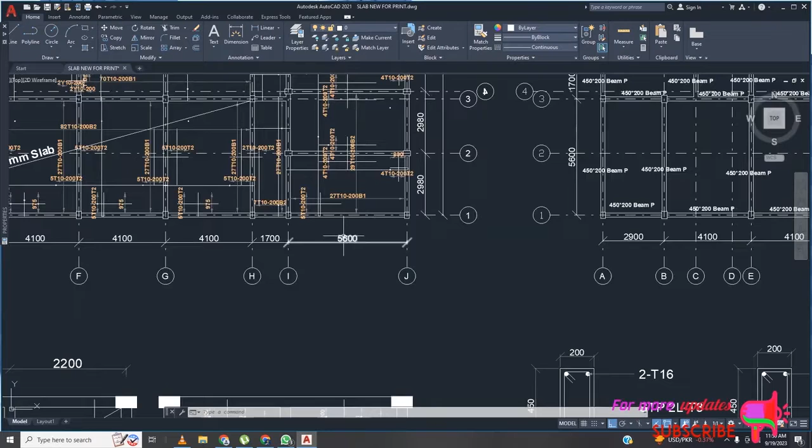Let's start. So you can see I have my AutoCAD file here. First of all, it is important to have a reference dimension so that you can use it to scale your drawing after you import it to Archicad. So this will be my reference, which is 5600 millimeters.

Then you need to close your file before importing it to Archicad. So I will close this file. My file is this one, Slab New For Print. Then I'll open my Archicad and create a new file.

So to import your file, you need to go to File on the top left of your screen, then Interoperability, then Merge, then Merge File. I will select the file that you want to import from AutoCAD to Archicad. So I'll go and open it, it's called Slab New For Print, and it is a DWG file.

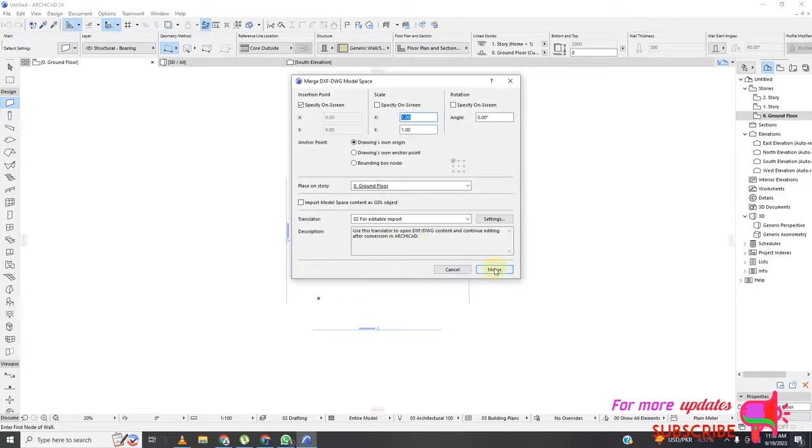Then skip all, then I'll merge. Then click just here, and then OK.

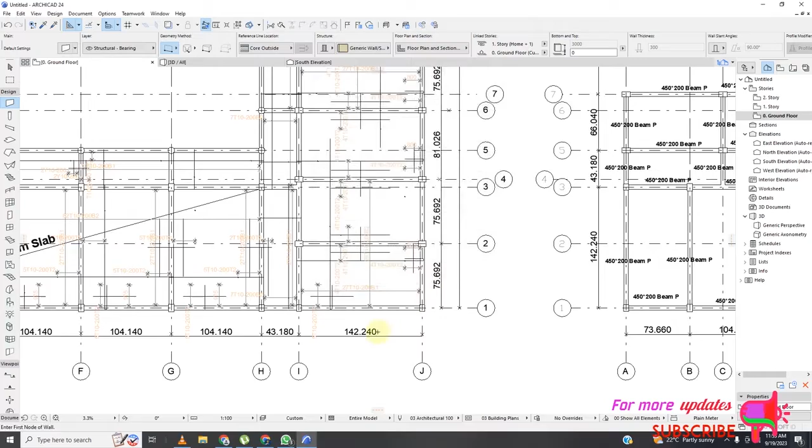So you can see my dimensions have been reduced into very small dimensions. My dimension in AutoCAD is in millimeters. To check your dimension in Archicad, you need to go to Options, then Project Preferences, then Working Units. You can see I'm working in millimeters. So this one is 142.24 millimeters, and now I need to scale this drawing.

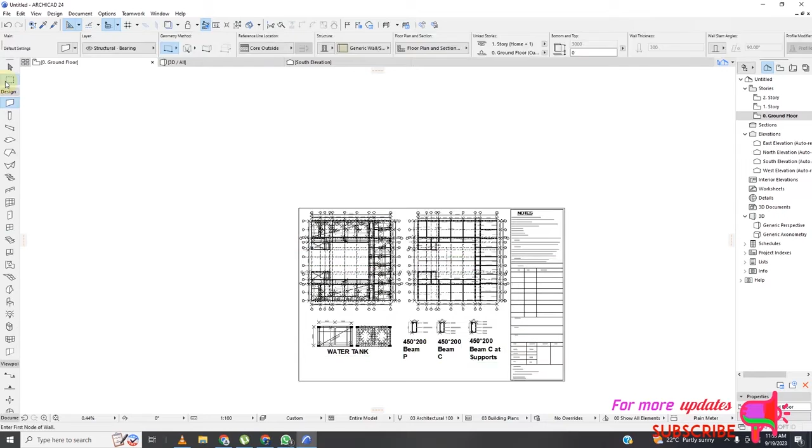So to scale this drawing, you need to select the drawing. To select, you can either hold Shift and then place your cursor and drag it - that is one way, and then click there. Or you can just select your marquee tool, then drag it, and then hold Control.

So to scale this drawing, you need to go to Edit, go to Reshape, then Resize, and then click OK, and then select your reference scale, so this one up to there. My dimension there was 5600 millimeters, so enter 5600 and then click Enter on your keyboard.

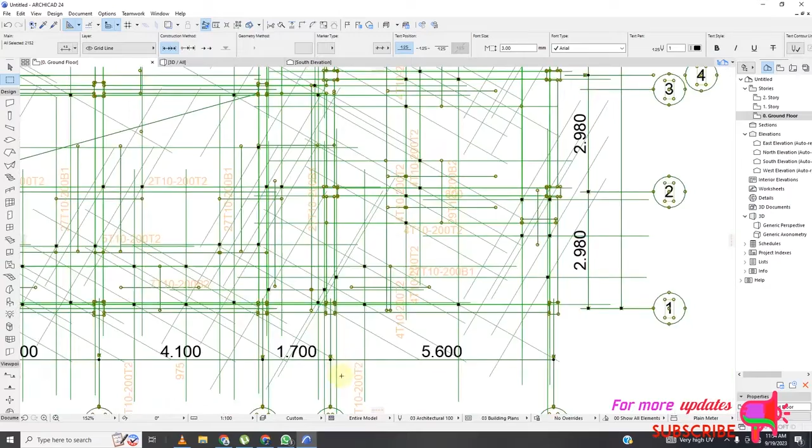Oops, there are two problems. Don't worry, I will show you how to solve this. First of all, you can see that my dimensions are in meters, but I want it to be in millimeters. I want this to be 5600.

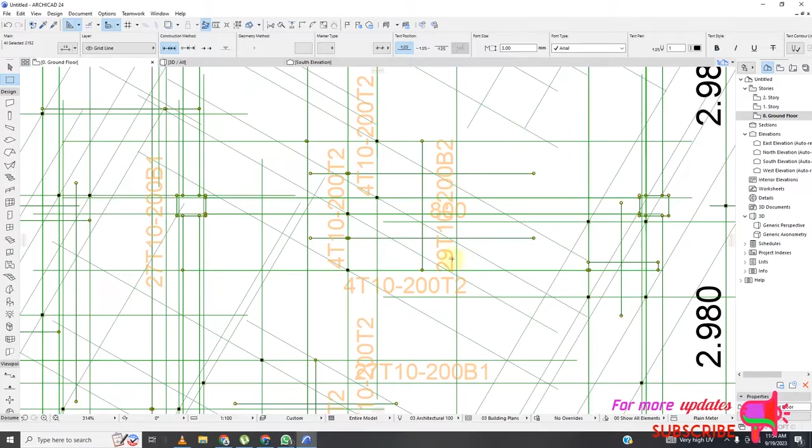Second, there are lines which do not appear properly. If you check this line carefully, these are the dimension lines for these bars. If you check very carefully, these ones are the ticks which are not appearing properly. You can see all where I've labeled my bars, they don't appear properly. So how do you solve that?

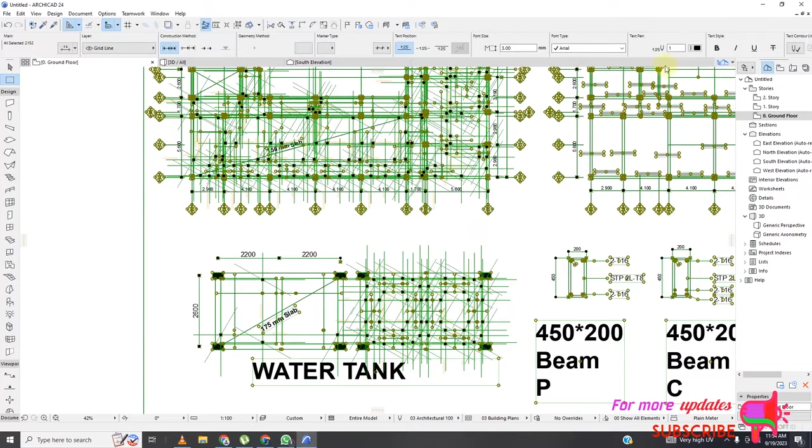First of all, I will close this. I've done that deliberately - don't worry, because I don't want you to face the same challenge and struggle to find a solution. I have it here all in one.

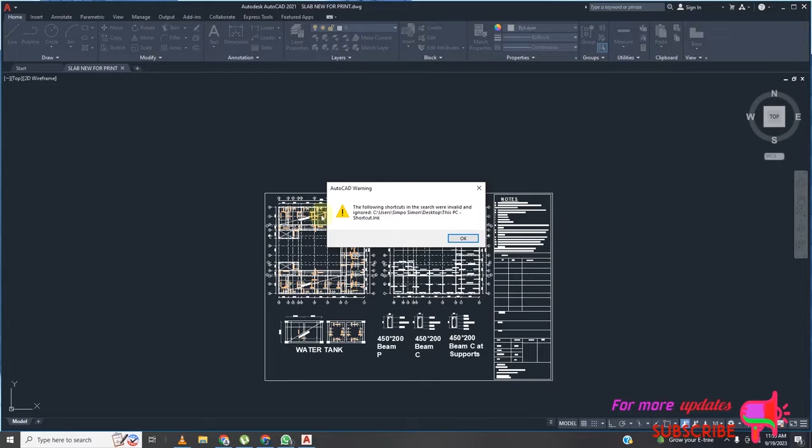So the problem was this: you can see when I import this to Archicad, it appears in a way which is not proper, because Archicad is changing it into Archicad ticks - architectural ticks.

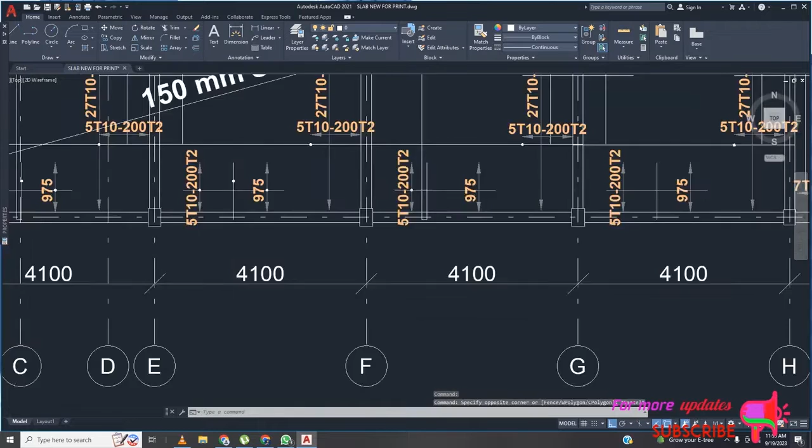So first of all, you should select all of these. Select similar, and then select similar again. Then you want to select all of them using Select Similar. I don't know if there's one which is not selected - let me just go through carefully.

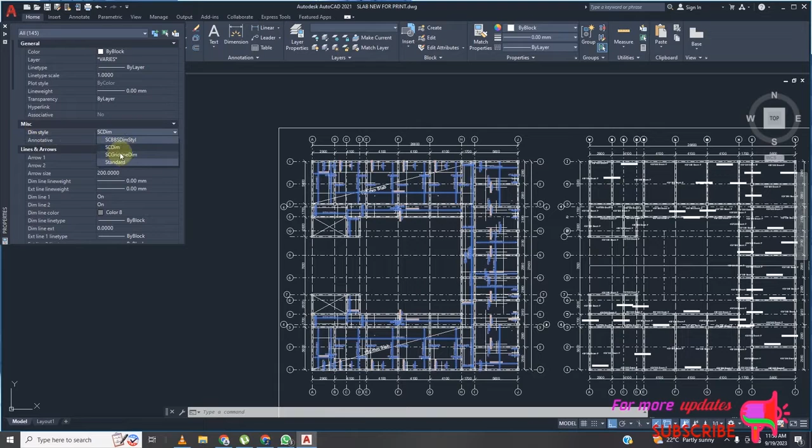Okay, so now that you have selected all, you right click on your mouse and then go to properties. What you need to change is the dimension style. When you change this, that problem will disappear. Now you can use either SC grid line. So change the dimension style - you can see MISC dimension style, change it to SC grid line. Now that problem will not happen again.

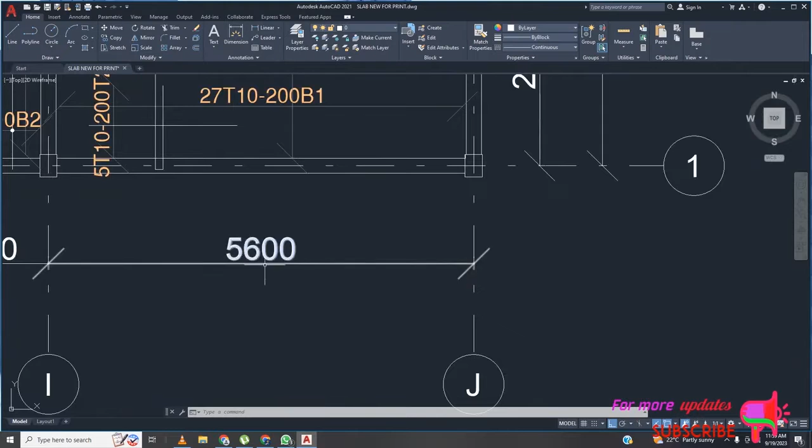So then you must close this file before you import it to ArchiCAD. You can see now this is still my reference scale, so I'll close this. Cancel first, then I need to save it, then I'll close it.

So let's open now ArchiCAD. Then open. View.

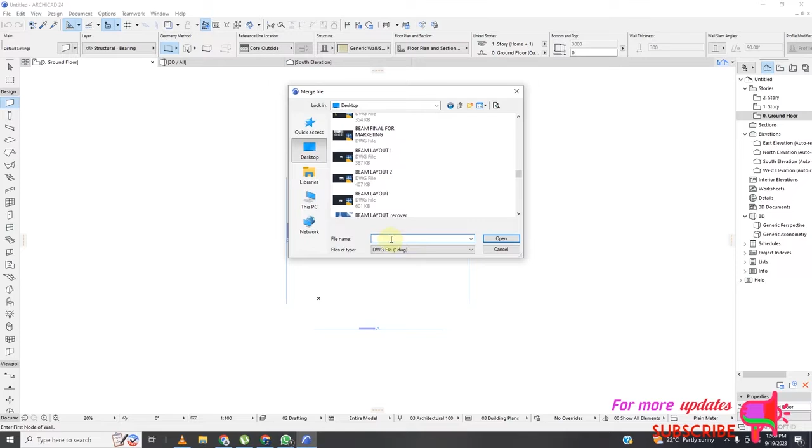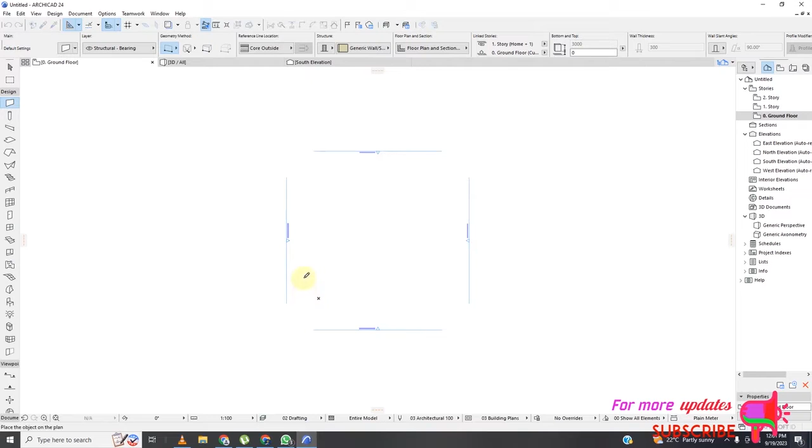To import, remember you go to File, you go to Interoperability, click Merge, then Merge File, then you select your file. My file was slab new for print DWG - this one is my file. So I hit open, then okay. And then you can just keep all. Then merge, and then click anywhere inside this, then okay.

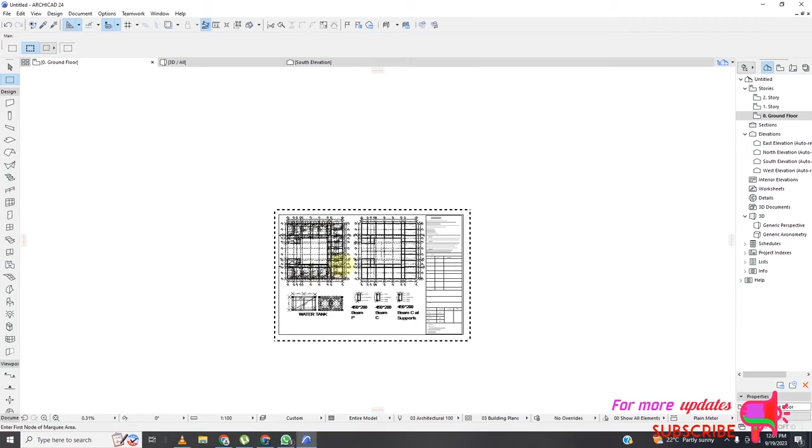And now select the marquee tool and drag it. That is the area I want to print. Then Shift Control, and then first of all, very important, you need to ungroup, suspend all groups, so that you can be able to resize.

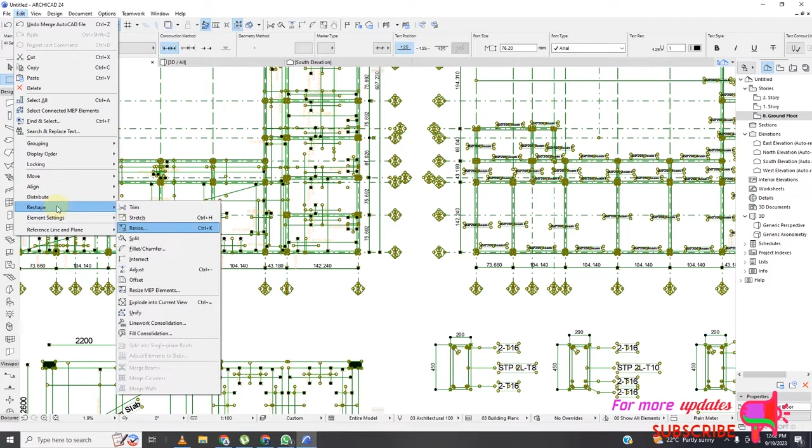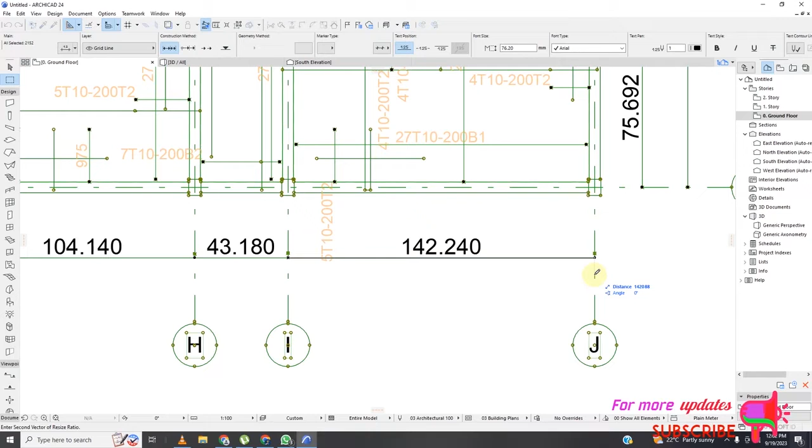So don't forget that - to suspend all groups, now go to Edit, go to Resize, go to Reshape, then click Resize, then okay, then click here, then click. If you don't select your ungroup, if you don't suspend, remember you will not be able to scale. So this one was 600. Enter.

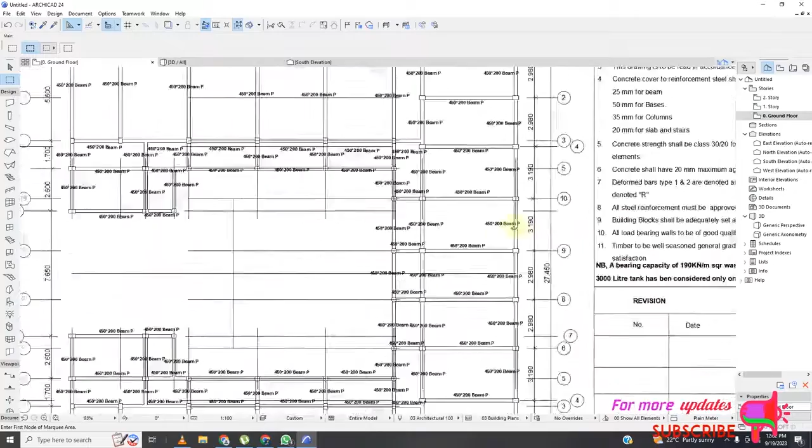Now you can see my lines appear properly. Okay, so the other problem, I can escape it - it's now my dimensions, which are in meters instead of millimeters, and I want these dimensions to be in millimeters. So what should I do?

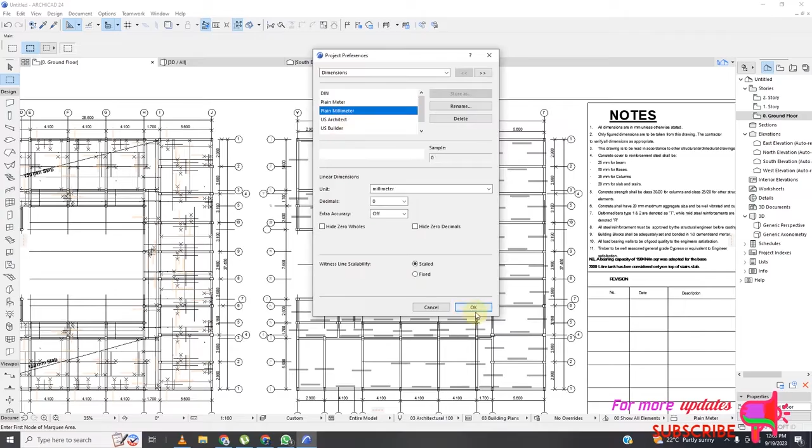Go to Options, go to Project Preferences, go to Dimensions. Now you can see I'm currently using plain meter. You should change it to plain millimeters. Then okay. After you do that, you can see now the dimensions have changed into millimeters - now you can see it is 5,610 instead of 5.6.

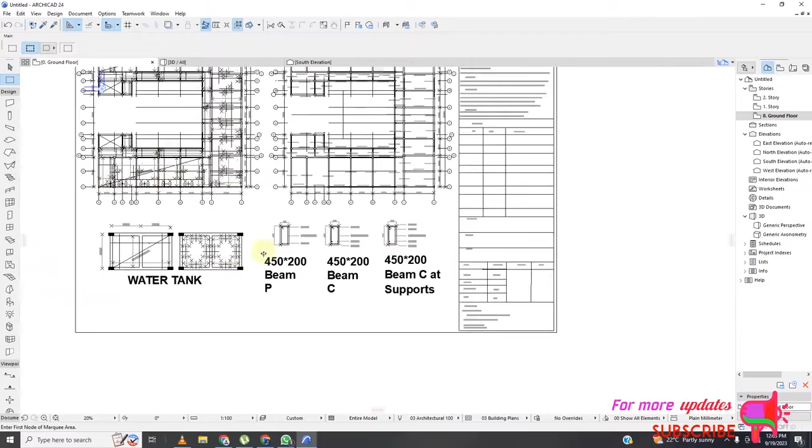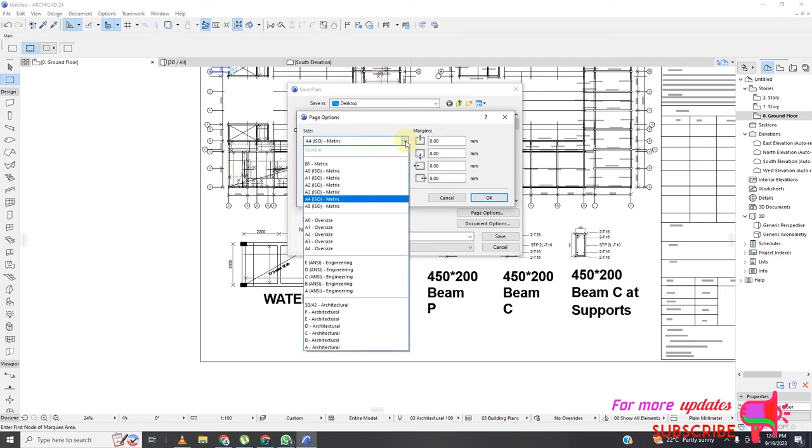So after that, we can now go and print our architectural file into PDF. To print, you basically need to go to File, then go to Save As, then you need to select PDF, very important. And then you need to go to Page Options - you need to select the size of your paper. Me, I will choose A1, then I will choose landscape here. It's okay, then okay, then I go here to Document Options.

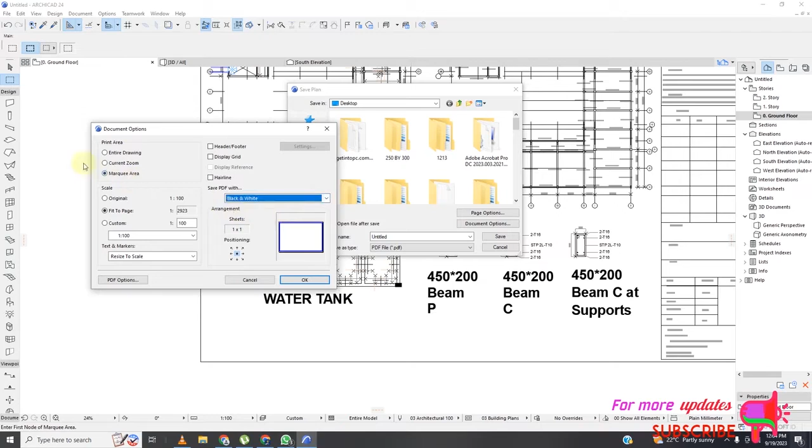I want to print the marquee area, I want to fit into page, so fit into page, and then you can select here - I want it to be in black and white. So print marquee area, fit to page, and then black and white. And then okay, and then I will select a name - I will call it slab PDF. Then I will save it.

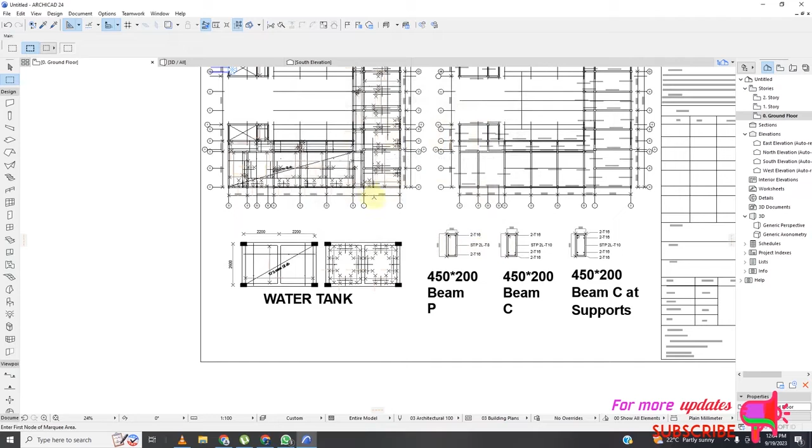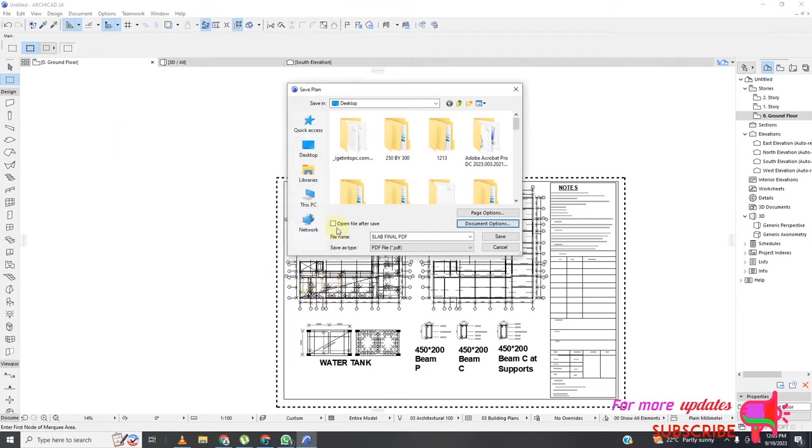I can see I don't have marquee area - let's select this, drag it here, but I can now be able to save it. Go to Options, Save - Slab Final PDF, and then still the same A1 landscape. Options, marquee area, fit to paper, and then black and white, okay, and then option open file after saving, and then save.

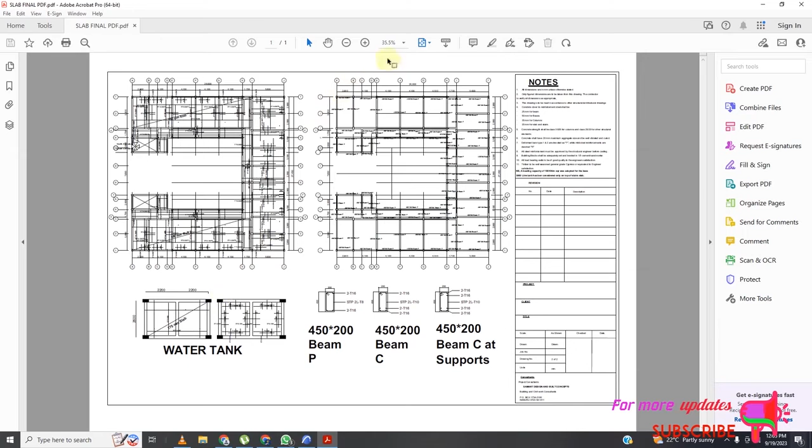I forgot to do this and save, but it will open my PDF. So you can see now my PDF has opened in my Adobe Acrobat. So I can just increase the size. You can see now. So that's how we do it, guys.